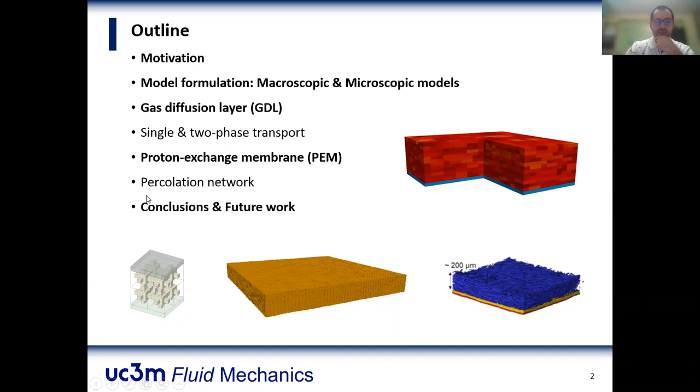Well, this is the outline of the presentation. First, I will give you a brief introduction to electrochemical devices and porous media. Then we will focus on the model formulation, the coupling of macroscopic and microscopic models. Then I will show you results regarding gas diffusion layers. We will discuss single and two-phase transport. And then we will focus on the proton-exchange membranes, in particular, how we model conductivity of membranes using a percolation network. And finally, I will give you the conclusions and future work.

Okay, so here on the left, we have several electrochemical devices such as lithium-ion batteries, redox flow batteries, fuel cells, and electrolyzers. And something that is common to all these electrochemical devices is porous media. So here on the right, we can see we have gas diffusion layers, which are present in fuel cells and electrolyzers. In all these devices, we find membranes to separate the compartments and allow the transport of ionic species.

Then we have macroporous electrodes, which are rather similar to gas diffusion layers. We can find these, for example, in redox flow batteries. And also we have catalyst layers, like in fuel cells and electrolyzers, where the electrochemical reactions take place in these two devices in particular.

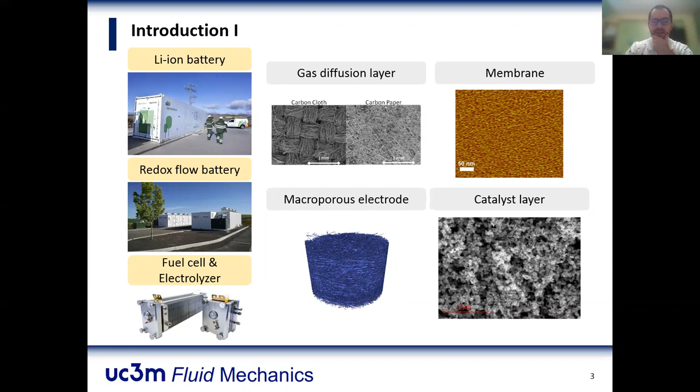Okay, so there are several porous media. They play different roles in electrochemical devices, and modeling them is essentially a multi-scale problem. Because here we have the different scales of modeling in engineering. We can go from electrons to the component level, and then finally we reach the application. So in terms of modeling of porous media, we can put different techniques on this scale. We have here pore-network modeling and direct numerical simulation. This will be at the component level.

So we saw these for the detailed transport in the components. For example, pore-network modeling is a usual practice to improve the prediction of two-phase transport in the porous media present in electrochemical devices. And then also we can use direct numerical simulation, combining tomography images with continuum modeling through the pore space, or even the solid phase if we are interested in electrical conductivity or thermal conductivity.

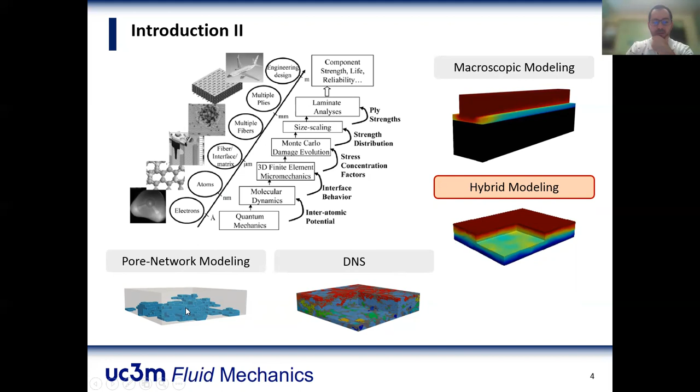But here we focus on this hybrid modeling, how we can incorporate into macroscopic models a better representation of the heterogeneities caused by the porous media, and how we can also improve the modeling of the two-phase transport.

And inside each control volume, we can have several computational cells. And then in between the control volumes, we have what we call the connectors, which physically in terms of the mesh are the faces between the two control volumes. So in this particular case, we have these two faces, two edges in 2D, between this control volume and this control volume. So this is our mesoscopic representation of the GDL.

We don't have the detail of the microstructure of the porous media, but we are not at the macroscopic level saying that there is a single effective property that characterizes that porous media. This is important in thin porous media, when we have a finite thickness, to include the heterogeneities we have in the layer.

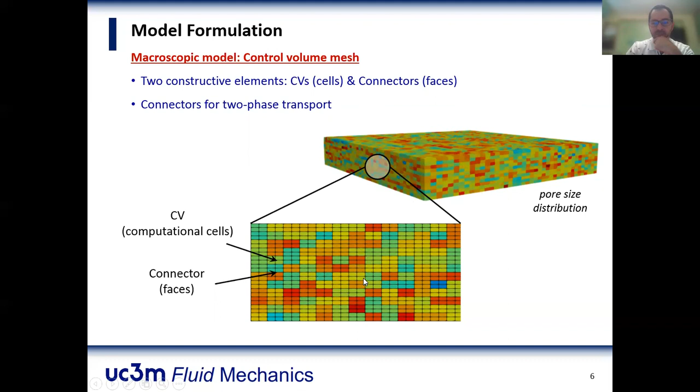So we have this representation. And then inside each control volume, what we include is the microscopic model. We include a pore-network representation of the porous media. Here we are using a structured pore-network, which is embedded into the control volume mesh.

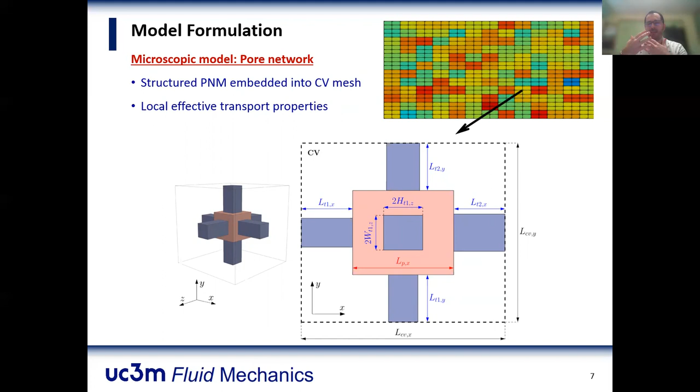And we use that pore-network to compute the local effective properties. Okay, so we are going to couple the pore-network and the control volume mesh through this local effective transport properties.

Okay, so to generate the pore-network, we use the standard methods. Here you can see the procedure. We start with a uniform distribution of cumulative probabilities and we assign pore sizes according to the experimental pore size distribution of the material.

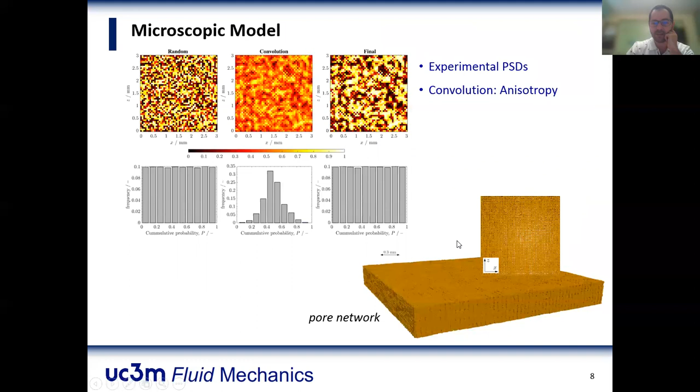Then, in this case, in order to capture the anisotropy of these materials, we include a convolution filter. And finally, we go back to the uniform distribution of cumulative probabilities. So we are not altering the pore size distribution of the material. Okay. So this is the standard practice, and finally we reach this result.

How we compute local effective properties: here I am focusing on local effective diffusivity. So essentially, we have species conservation. In this case, it is for transport in the y direction. So we have two throats and we have one pore. The flux coming through this throat, this pore and this throat must be the same according to mass conservation. And finally, we can combine this equation into a local effective diffusivity.

Okay, which characterizes the diffusive resistance of this pore or this control volume pore throat representation in the y direction. You can see that the result that we reach is similar to the harmonic average of the conductivities. Okay, so this is a classic result from pore-network.

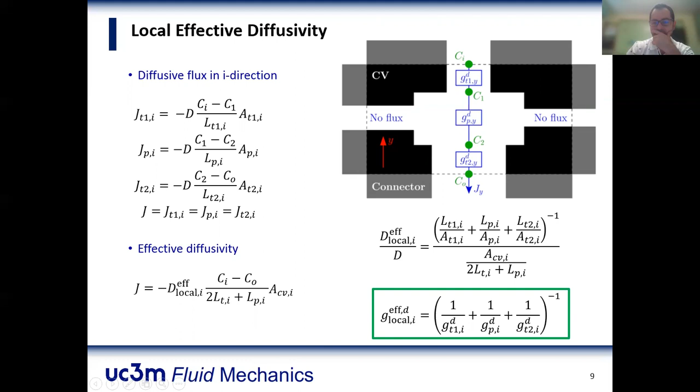Okay, so we have this way to calculate the local effective properties. We can do this in the y direction, but we can also do other directions in order to have the anisotropic local properties of the material. These are results for dry conditions. So this is diffusion. Here, essentially, we have diffusion and also some results for hydraulic permeation. So this is the pressure distribution. But here I will only comment on concentration.

So this is a simulation in the through plane direction. We impose Dirichlet boundary conditions for concentration on this face and this face. And we reach this concentration distribution through the material, and this is the same when we impose the concentration drop in the in plane direction, the material plane. And this is what we get.

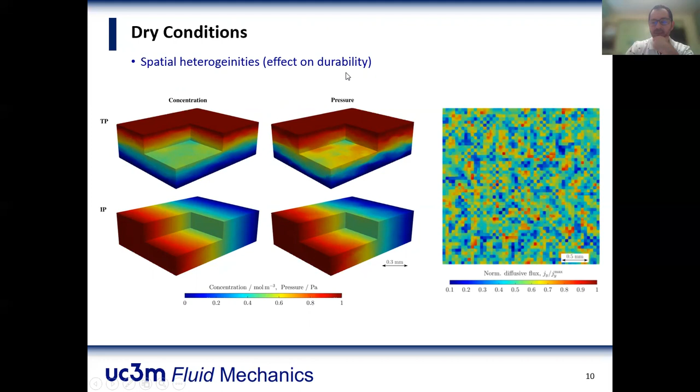This is the distribution of fluxes at this outlet surface, and you can see that there are strong variations of the diffusive flux. For instance, there is one order of magnitude of difference between the minimum and the maximum value of the diffusive flux. So this is important in electrochemical devices in order to study the effect of these heterogeneities on the durability. This is something we are working on now.

Also, another improvement we can make with this hybrid modeling is to improve the prediction in terms of two-phase transport. Essentially, as I mentioned before, we use the connectors as interfacial valves. So they open and close depending on the capillary pressure we have in adjacent control volumes to that connector, or those faces of my control volume mesh.

So here you have some results for capillary pressure. Here we have the different gas diffusion layers with different compression ratios, and you can see that we have good agreement with experimental data. We can also model invasion percolation, and we can even do evaporation condensation.

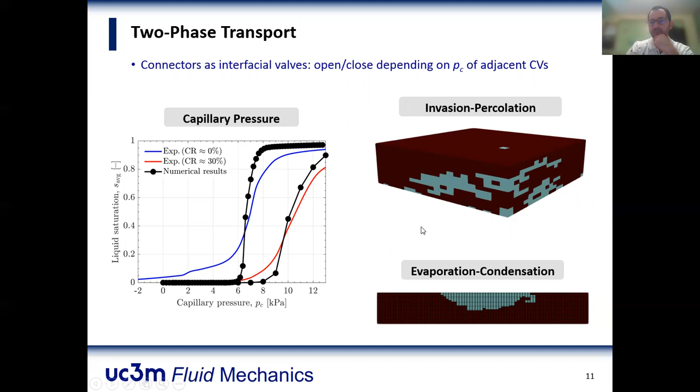Evaporation condensation in particular is ongoing work, but with this representation we can improve a lot the predictions in terms of two-phase transport compared with macroscopic models. So this is important for material design, for example, in order to provide a good modeling of the two-phase transport in fuel cells.

And then finally, some results in terms of gas effective diffusivity under two-phase conditions. So here we have the relative effective diffusivity, and we have different average saturations in the porous media. You can see that we follow a power law of the form (1 - s)^3. This saturation exponent of 3 is in agreement with previous experimental data.

I would like just to emphasize the importance of the peak saturation here. If we have here the injection face, we usually have much higher saturation near this injection face compared to the opposite face. So these bottlenecks that are created due to the accumulation of water near the injection face are important in order to capture the (1 - s)^3.

Okay, so here, for instance, we are combining the modeling of two-phase transport with gas diffusion. We can do this combination of modeling in a very straightforward way with this kind of modeling.

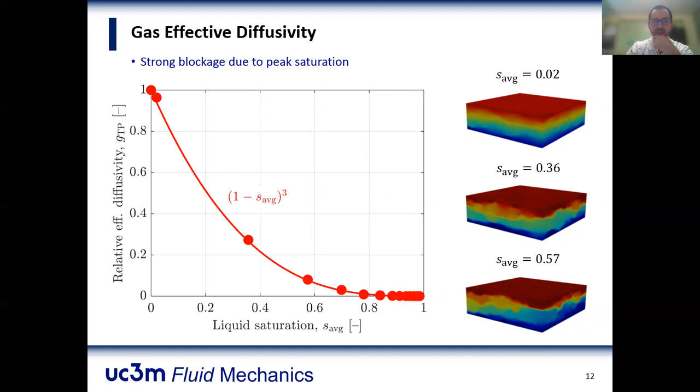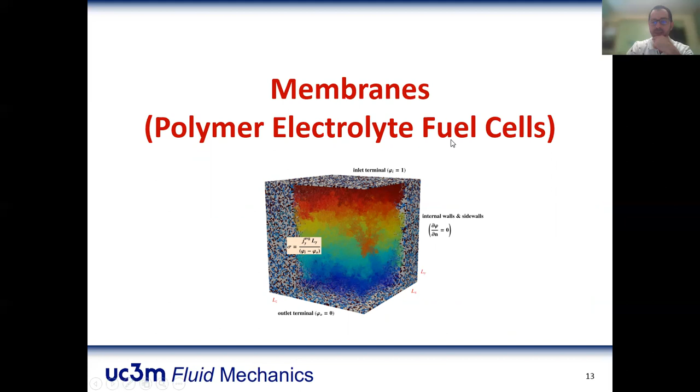And okay, then I will focus on some results for membranes, also with application to polymer electrolyte fuel cells. So here we adapt the model. Now we have a percolation network. In this case, we use only one computational cell per control volume, and then we have homogeneous local conductivity. We are not computing local effective properties. So we have homogeneous conductivity in those sites that are conductive, and between sites that are conductive and those that are non-conductive, we have a no-flux boundary condition.

So essentially in our percolation network, we have three types of sites. We can have material that is completely dry, so this is a non-conductive site. Then we can have some disconnected weakly hydrated or non-hydrated sulfonated sites. These will also be non-conductive sites, because even if they are sulfonated, they are disconnected from the water network, which is providing the ionic cluster for the transport of protons through the membrane.

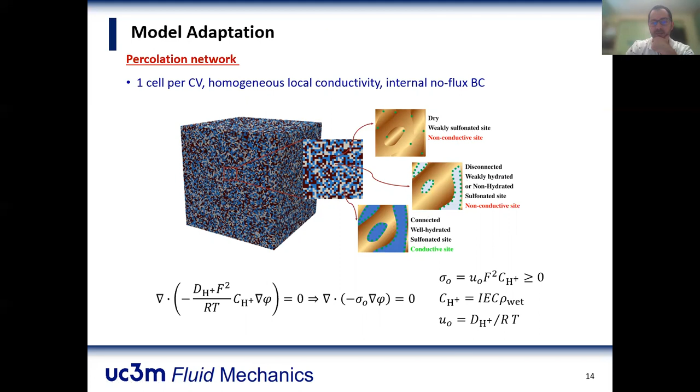And to model the proton transport, we use the Nernst-Planck equation, which is simplified to the migration term. This is the bulk conductivity we have in the conductive sites. It's given by this expression in terms of the mobility of protons. And then we have the no-flux boundary conditions between the conductive sites and the non-conductive sites. So we are using this modeling approach.

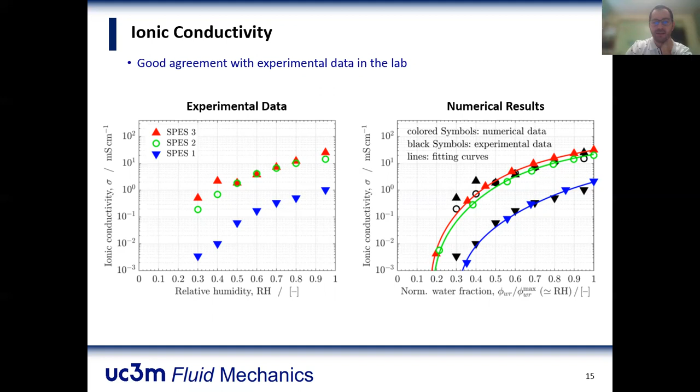Here we have some results. These are experimental data extracted in the lab for membranes with different sulfonation degrees. Here we have the ionic conductivity as a function of relative humidity, and the comparison between the numerical data and the experimental data. The black are the experimental data, and the colored lines with symbols are the numerical results. You can see that there is good agreement between the model prediction and the experimental data using this modeling approach, where we have a percolation network, but we are solving continuum equations in this hybrid modeling approach.